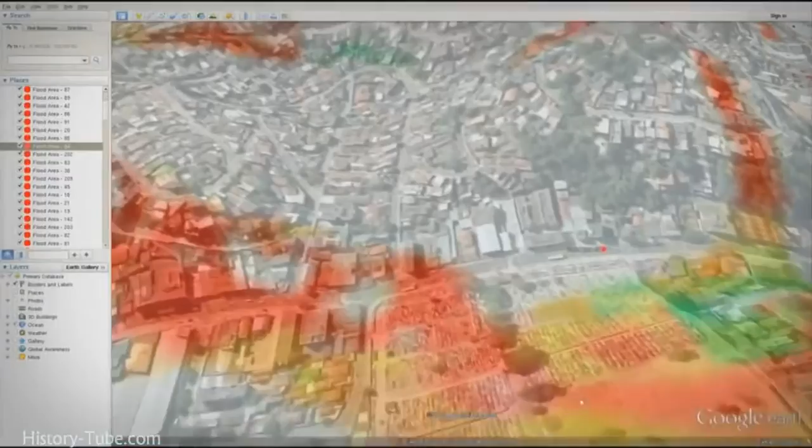In the real world, the answer to the question of can we see into the future has been answered with a resounding no. In our ever-evolving society, the trend today is to look toward the future by relying on predictive modeling to best predict the probability of an outcome. But we all know that even these well-thought-out predictions based on data often turn out to be not so predictable.

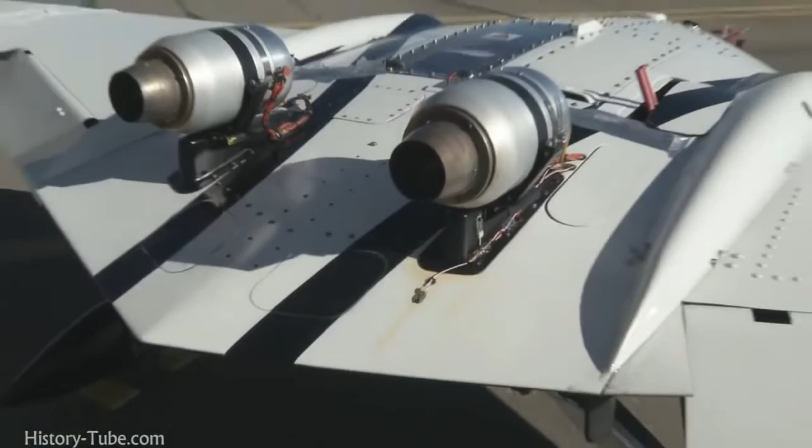Although it's clear that future events remain virtually unknowable, there is one group within NASA that comes as close as you can to seeing into the future. Throughout NASA's field centers, members of the Fixed Wing Project team are peering into the future every day and coming up with concepts that they believe will be on the next generation of aircraft. Because it takes years to plan and develop these concepts, the hardware and theories that are being tested today will be key components that enable the next generation of aircraft to take flight.

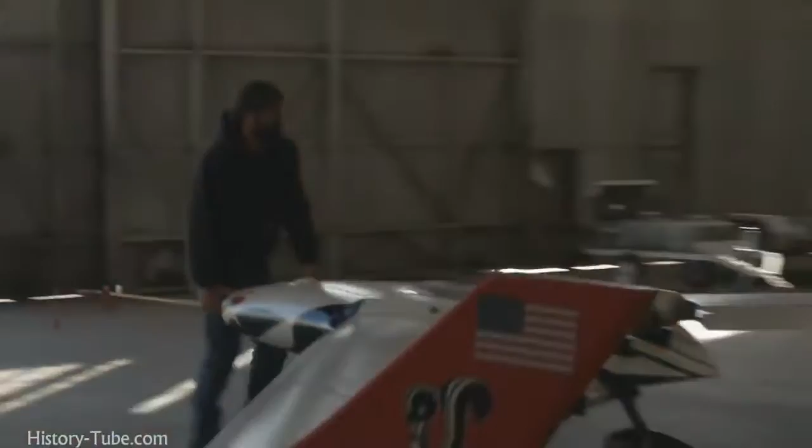On this episode of NASA X, follow us around the country as we visit members of the Fundamental Aeronautics Program's Fixed Wing Project, who are developing the framework that will shape how aircraft of the future will fly. Take a look behind the gates of NASA to see what some of these new ideas look like and how the engineers of NASA are paving the way for the ideas that will change the future of flight.

To the untrained eye, most of the aircraft of today look very similar. This is because over the past century of flight, aeronautical engineers have worked hard to optimize passenger aircraft to the point where they are as efficient and safe as possible. As a result, the basic tube and wing shape has been configured and examined from every possible angle, making it the most efficient design possible today.

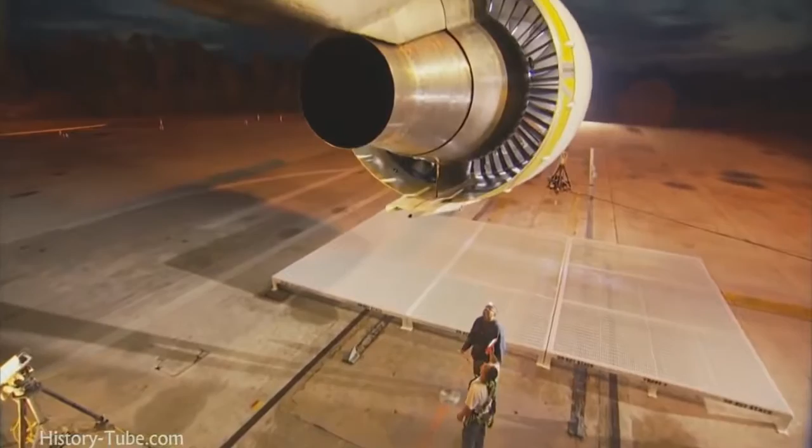Although aircraft have looked basically the same over the past few decades, if you look closely, you can see some of the major design changes. Wings that were once swept back more dramatically now are less so because of advances in aerodynamic shaping. Engines that spewed emissions by the ton are now much more efficient. Materials that were once so heavy that they significantly weighed down a craft are now much lighter and stronger.

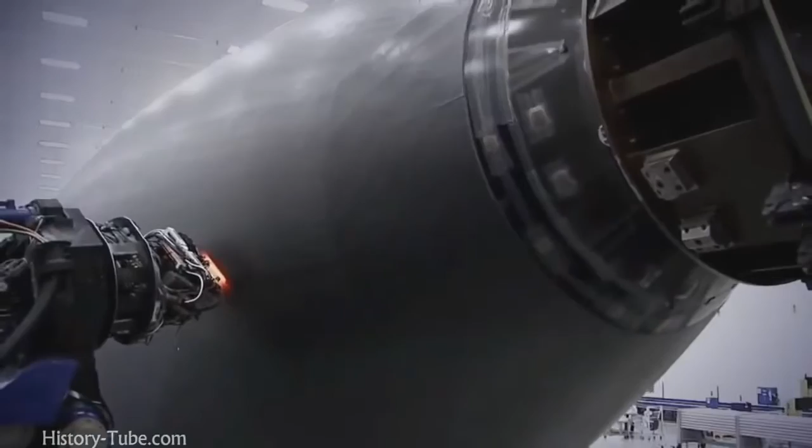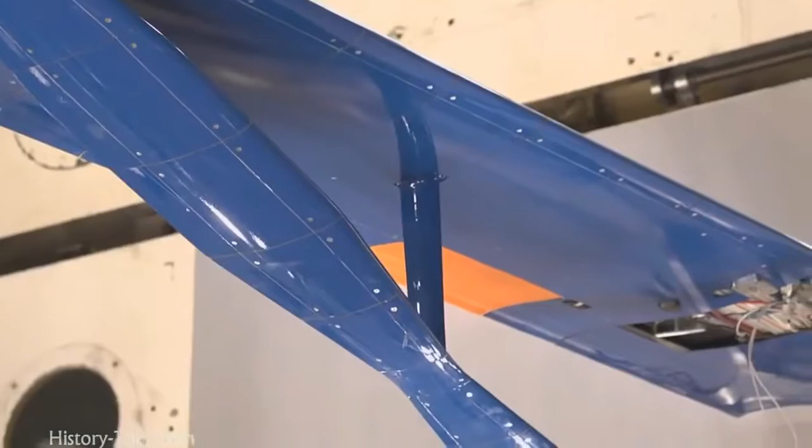With all this improvement and efficiency, it is fair to ask if there is anything else that can be done to make flight even better. The answer is of course yes. Behind the gates of NASA, there are scores of researchers who know that we can still make aircraft better because they are working toward these long-term goals every day. Some of these researchers from the Fixed Wing Project are working on so-called N+3 configurations and goals.

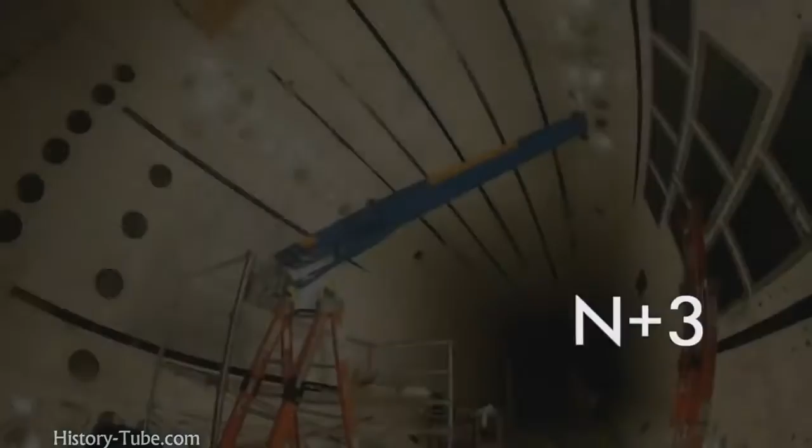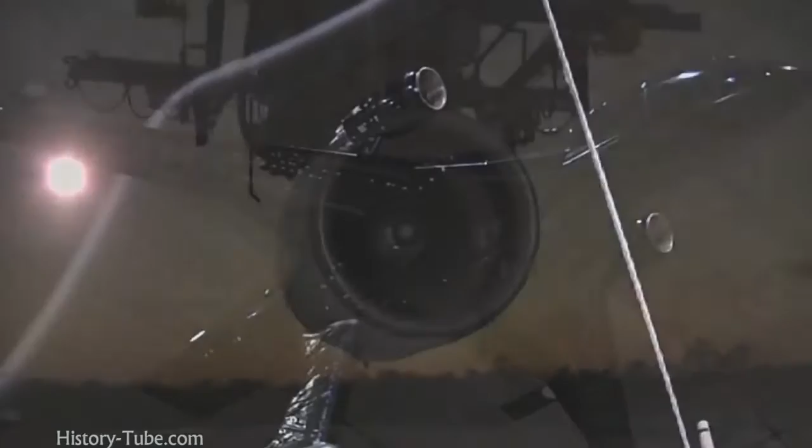In mathematical terms, the letter N is where you start now. N+1 is the next step. N+2 is just beyond that, and so on. Here in the Fixed Wing Project, N+3 equates to aircraft that will be flying in around the 2030-2035 timeframe. For this team, everything is on the table, including engines, fuels, wings, and fuselage shapes.

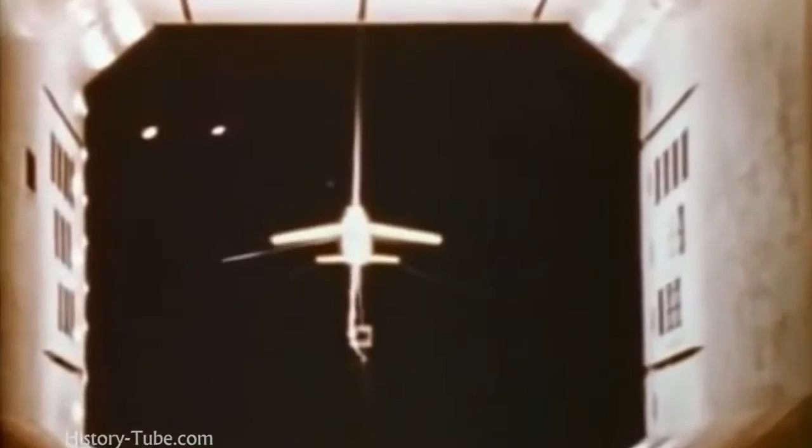Well, we need to remember the first A in NASA is aeronautics. So it's a National Aeronautics and Space Administration. Aeronautics is the field of research for airplanes. The airplanes that fly today were researched and experimented with within NASA many years ago. So we're trying to continue that tradition, that important work that we have done for the nation and the world, for 20, 30 years from now.

Fixed Wing is a NASA research program where we are doing activities to try to improve the airplanes that we're going to be flying in the future. We're trying to make them less noisy. We're trying to make them better for the environment. We're trying to make them in a fashion that they will use less fuel.

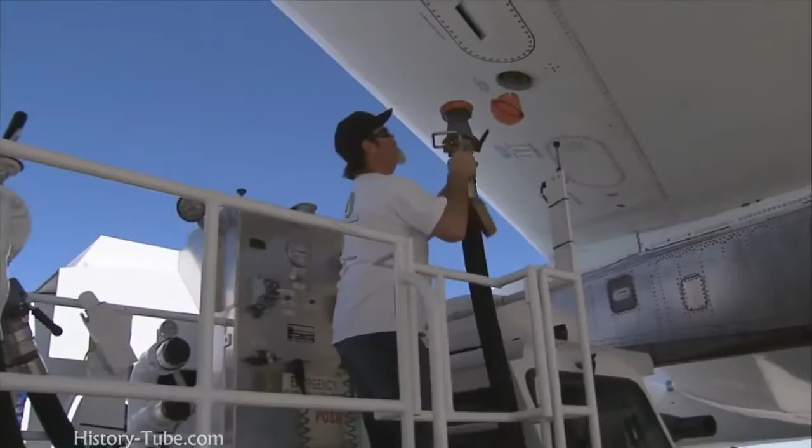The research we're doing is important because air travel is such an important part of your life. People travel, and even if you don't travel, cargo gets carried every single day. You use something every single day that gets carried by an aircraft. It's part of our way of life these days, and it often gets taken for granted. There are challenges though, so we are focused on exploring and developing technologies and concepts to improve the energy efficiency and environmental compatibility of transport aircraft.

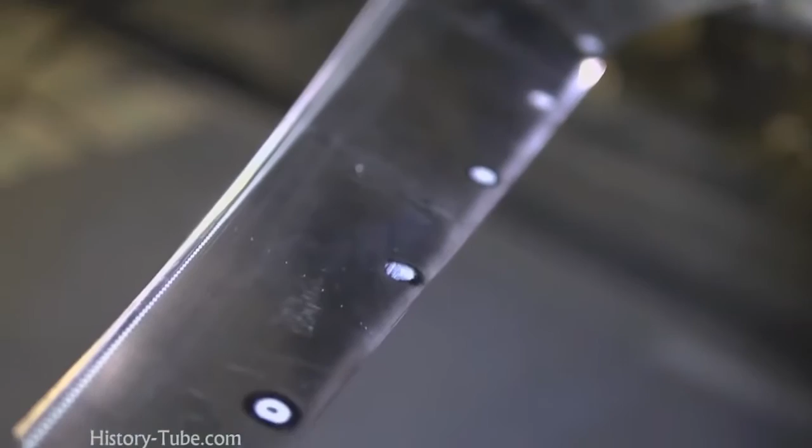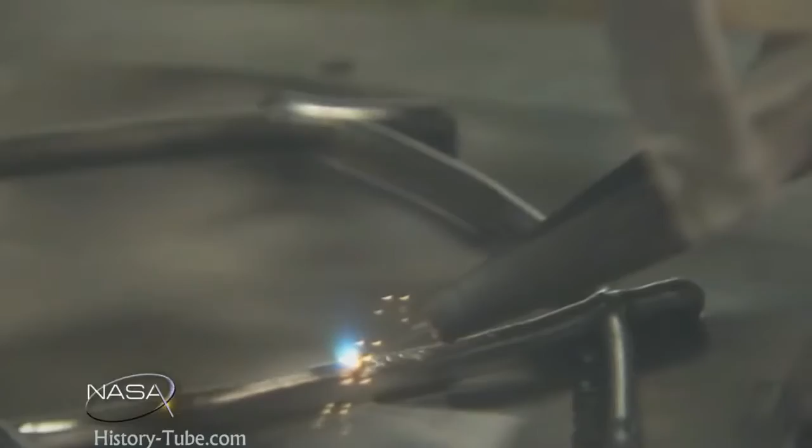With this mandate to significantly lower noise and emissions and increase performance for subsonic aircraft, there will be a need to address virtually every aspect of the current aircraft configuration, including developing new materials and engines, testing alternative fuels, and even changing the fundamental shape of the aircraft.

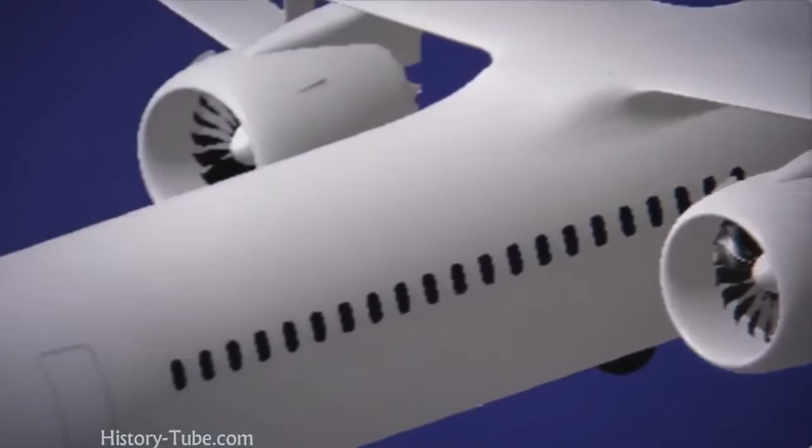All across the country, fixed-wing researchers are doing just that. Major advancements are being made into the understanding of how future aircraft will fly. Because there are so many areas of study, let's first look at something that has the potential to be used today as well as in the 2030 timeframe: alternative fuels.

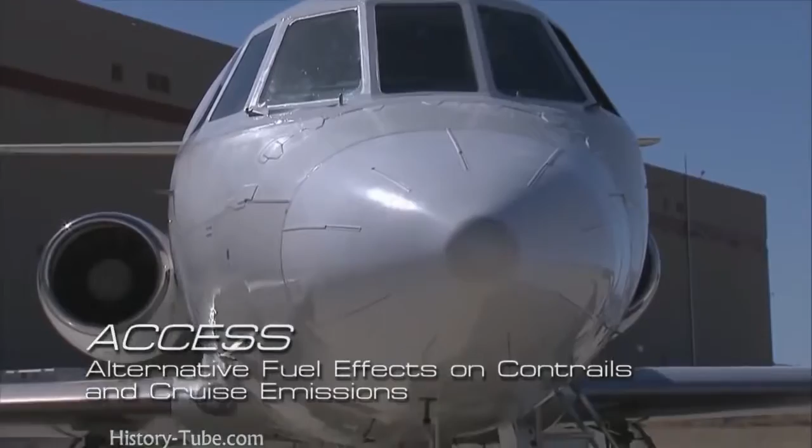On this beautiful morning at NASA Dryden in California's high desert, a test called ACCESS, or the Alternative Fuel Effects on Contrails and Cruise Emissions test, was performed to study the effects of alternate biofuel on engine performance, emissions, and aircraft-generated contrails at altitude. For this test, 2 aircraft were flown in tandem.

The first is NASA's DC-8, which will be burning an alternative fuel. The second aircraft is NASA's Falcon that will fly directly behind the DC-8 to measure and characterize the emissions coming out of the engines from the alternative fuel. Here is NASA's Bruce Anderson to explain.

NASA's role is in assessing the combustion characteristics of alternative fuels, as well as determining how these fuels will affect the performance and emissions from aircraft. To understand how aircraft affect the climate, we need to make measurements at cruise altitudes.

So the focus of ACCESS, or the alternative fuel effects on contrails and cruise emissions, was to fly behind the DC-8 in flight and look at its emission and contrail characteristics as we changed from standard jet fuel to a fuel that was a blend of a fuel that was made from camelina plant oil, and also added 50% of Jet A to that.

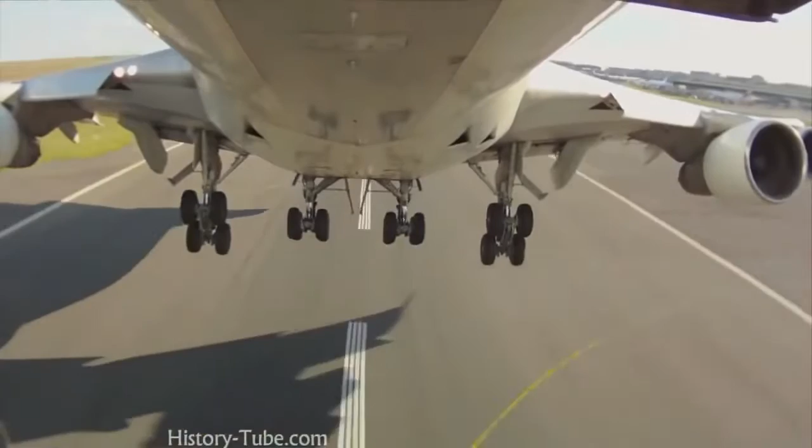The fundamental thing is the aircraft has to retain its performance characteristics when you burn a fuel. You can't have any drop in power. The fuel also has to have similar characteristics in terms of density and volume to kerosene. So what we're looking at is drop-in fuels.

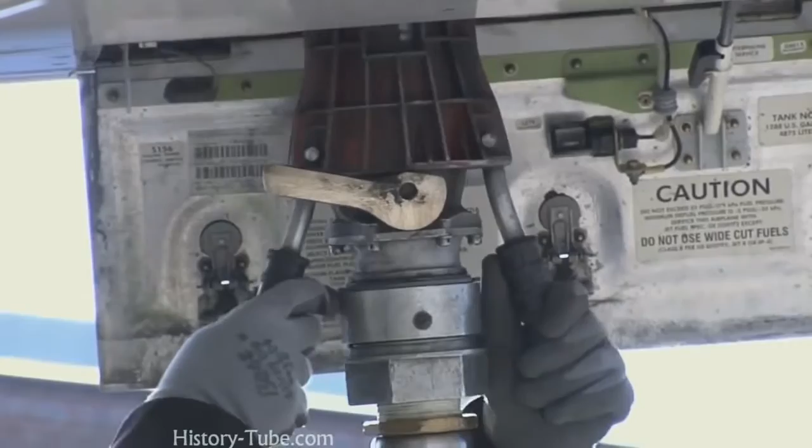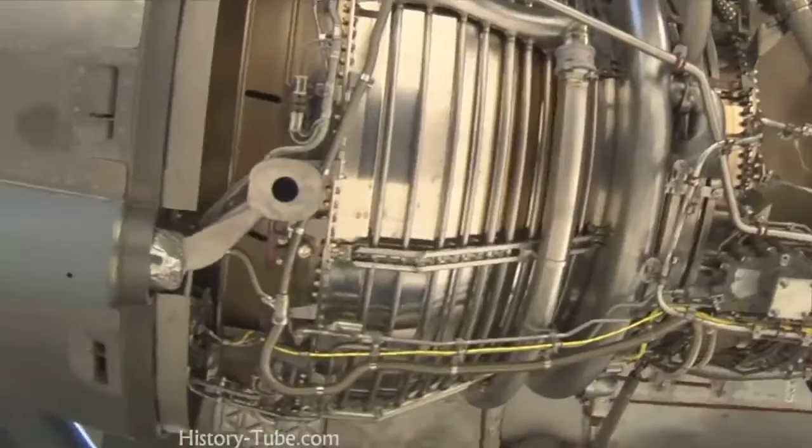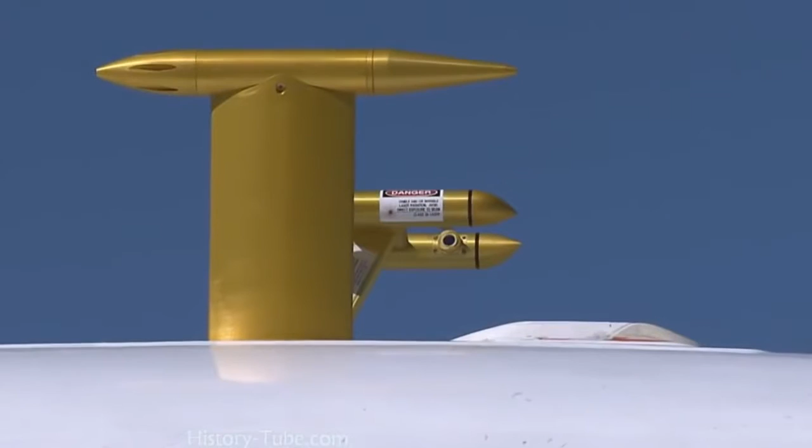A lot of the fuel systems on the aircraft are designed to rely on the aromatics in the fossil fuels to swell the seals to make them leak tight. So when we fly an alternative fuel, we have to mix it with standard fuel to retain those properties. Otherwise, the fuel would just leak out of the aircraft. And then the second thing we're looking at is just the emission characteristics. By that I mean the amount of pollutant generated per kilogram of fuel burn.

After the first few flights, it was shown that using these types of alternative fuels could significantly reduce emissions at cruise altitudes, particularly soot emissions. Work continues to better understand how to use these fuels and how to make them even more efficient for future aircraft.

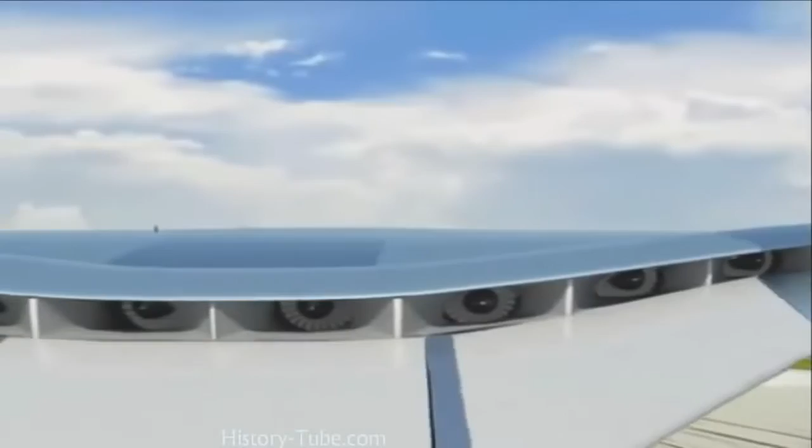Other than alternative fuels, there are some other ideas out there for finding more efficient ways to power aircraft. If we look on our roads today, many of the cars that are now being driven run on a combination of fuel and electricity. The idea that aircraft could do this seemed far-fetched only a few short years ago, but today, this idea is gaining traction. There are several ideas on how to do this, so let's take a look at a few.

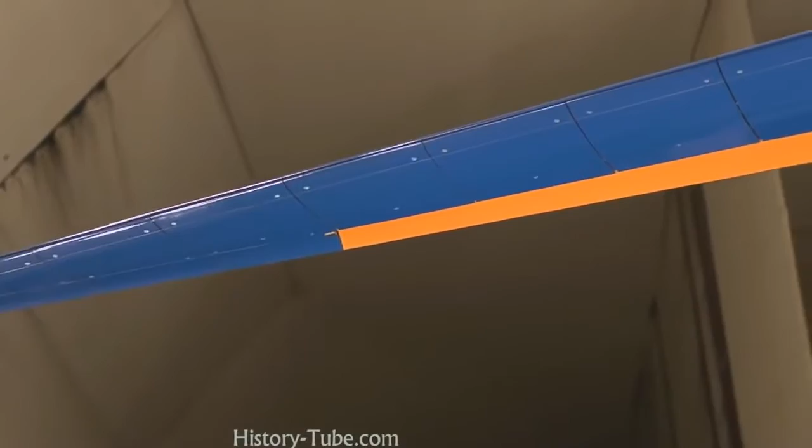Here, a team is looking over a new Boeing aircraft design called Sugar Volt. This unique design has several interesting changes, like the truss-braced wings that have the potential to reduce the drag of the wings by making them longer and thinner. Because thin, long wings have the tendency to flex more, designers have included a clever, efficient truss structure to support them. This design has the potential to reduce drag and weight, thereby making the craft more efficient to operate.

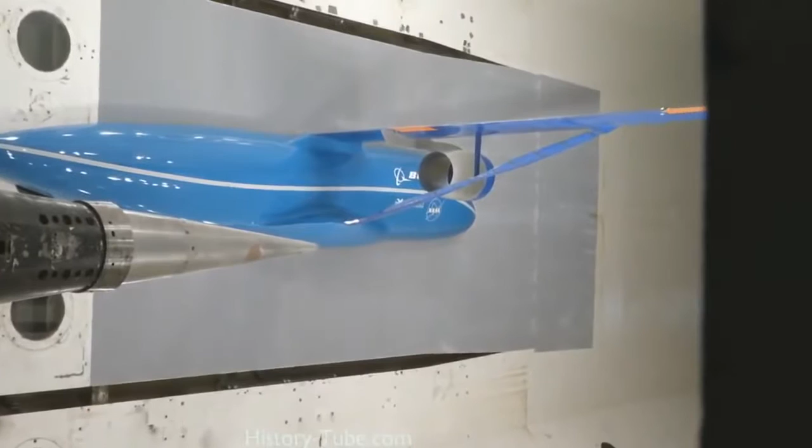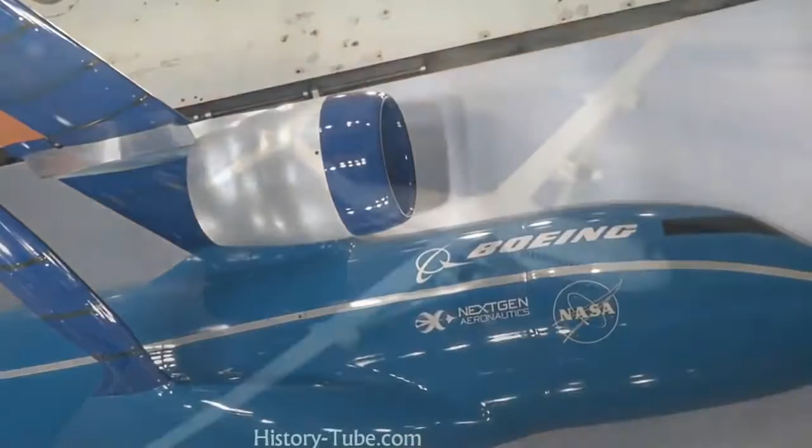At first glance, those unique structural changes may look like the biggest game changer for this type of aircraft, but the Sugar concept holds another surprise as well. In the case of the Sugar concept, what's less obvious to the eye when you see it is that it has an unconventional propulsion system. It's a hybrid gas-electric concept that's closer to what you see in a Prius. It has batteries and a gas turbine engine technology.

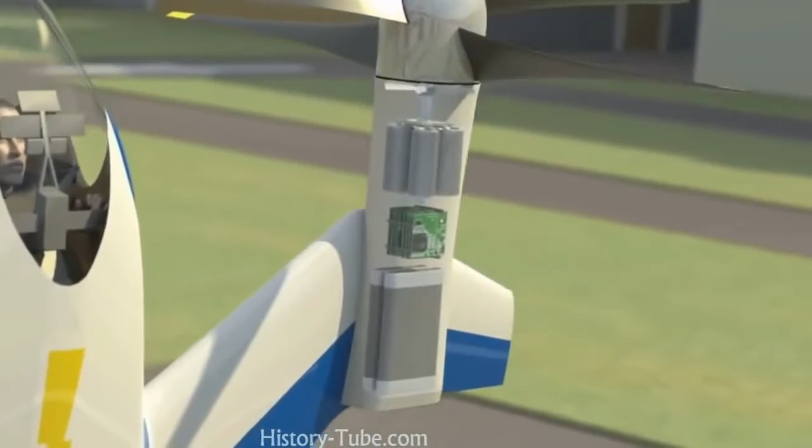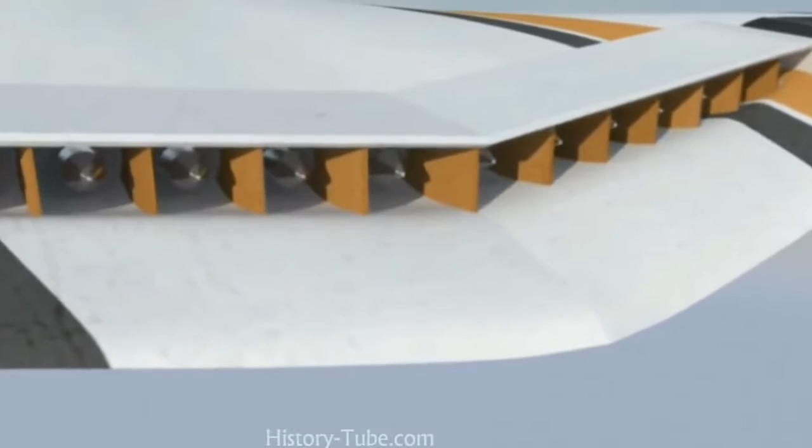It requires advances to battery technology, but those are happening throughout the world independent of the aerospace industry, and we're trying to leverage that. We do it on cars, we should be able to do it on airplanes eventually. The challenge is to take those batteries and have enough energy or power content and have them be lightweight.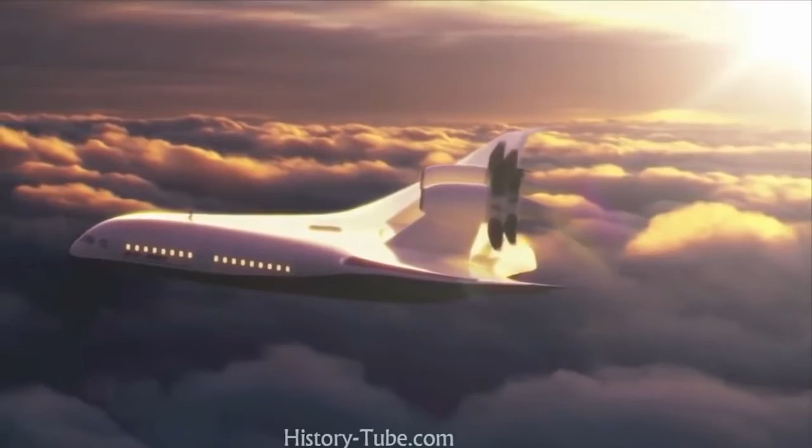Where we are today, I think, is we're at the dawn of the age where we can start to see electric propulsion or hybrid electric propulsion. And you'll see it on smaller aircraft first before you see it on the large commercial transports. But that's what we're working towards. That's good for cleanliness, it's good for noise, it's good for energy efficiency. Has its challenges. That's why we're working on it, and that's why it's not being done today.

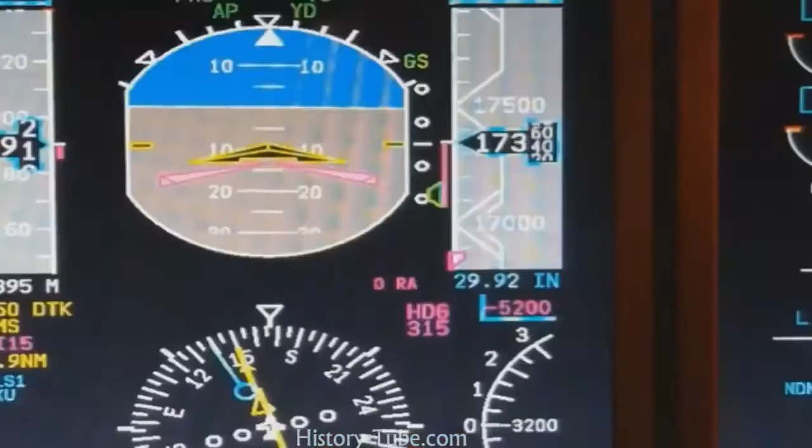The idea behind this vehicle is to have its twin engines burn fuel when great power is needed, like at takeoff. But when the craft is in a cruise configuration, a switch can be made over to a battery electric mode to supplement or even replace power to the engines. If successful, this could reduce the amount of fuel burn by up to 70%.

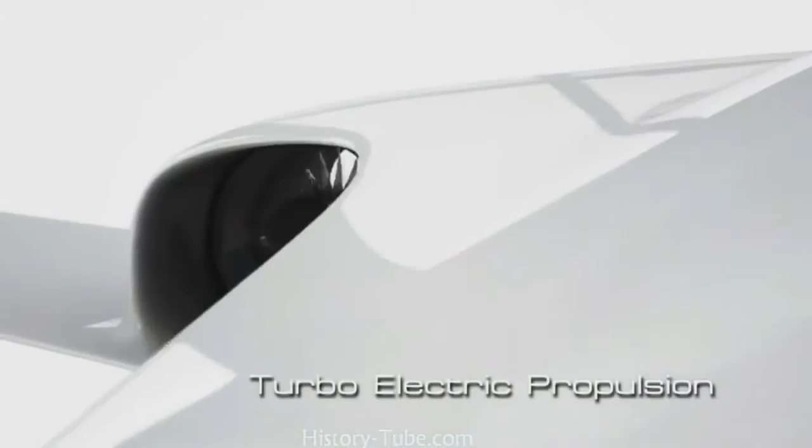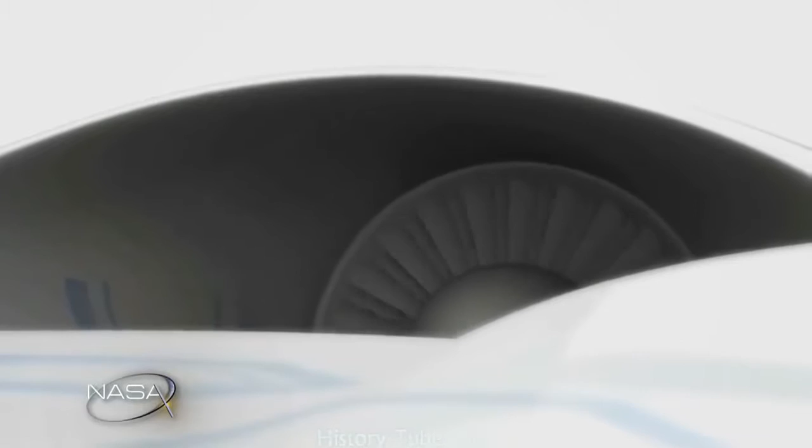Another concept called turboelectric propulsion is being studied here at the NASA Glenn Research Center. Here is NASA's Jerry Brown to explain. There's not been electric airplanes except in very small size. And the reason is that electric motors and generators tend to be too heavy for flight. We're hoping to change that, and we're hoping to get a benefit from saving a whole lot of fuel in the process. The type of electric propulsion that we're talking about today is turboelectric propulsion.

We're going to keep the turbine engine because it's really good as far as a lot of power in a small power plant. And then we're going to use its power to drive a generator, send electricity to motors that drive fans that do the propulsion. This concept will look very different from vehicles of today as well. Potential designs include 2 large turbine engines on the wingtips that will drive 2 large generators inside the body. The generators will in turn power a number of fans, providing the propulsion the aircraft needs to fly.

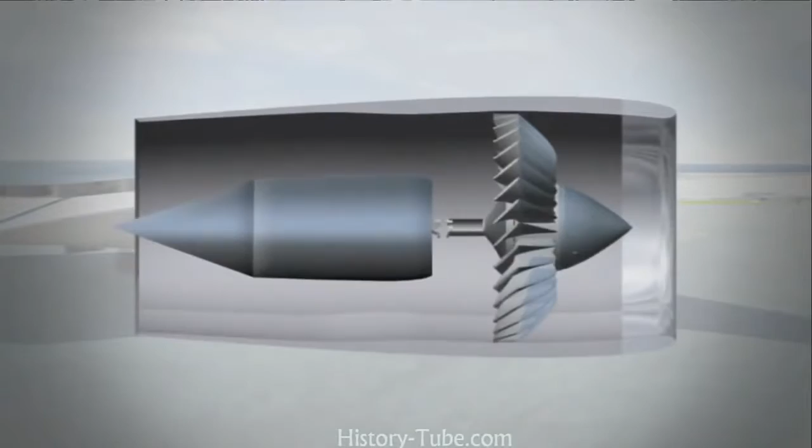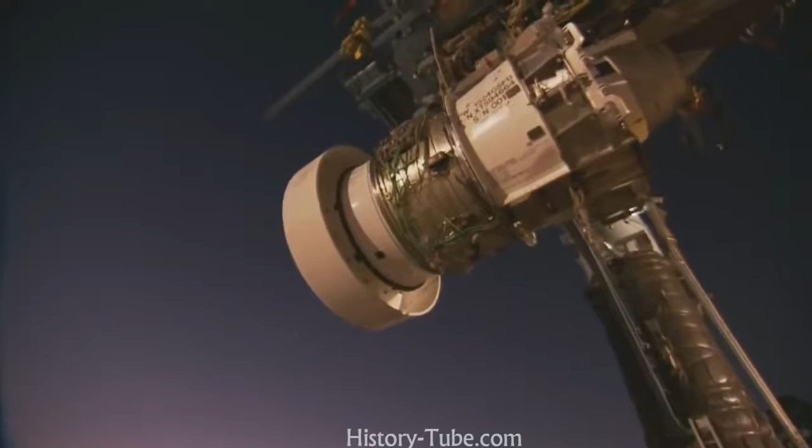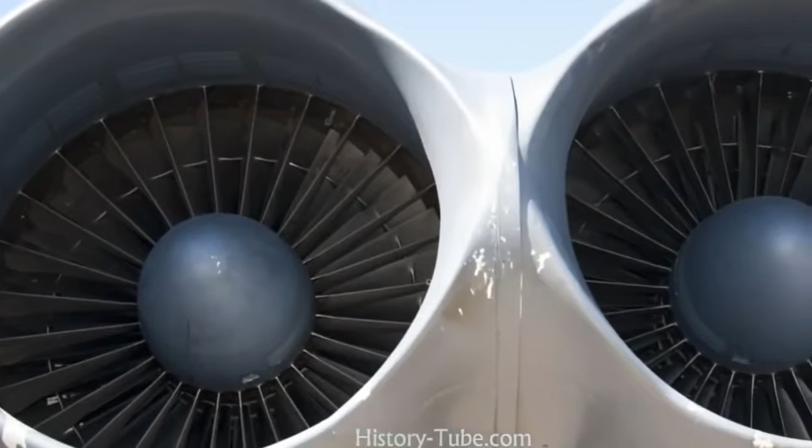What we want to do here is we want to be able to break the turbine engine from the fan, and that gives the aircraft designer a lot of freedom. If he can move the turbine engine somewhere else in the airplane, that may itself have advantages. The engine and the fans don't have to turn at the same speed. You don't even have to have the same number of fans. And that's what we're really looking for, is we want to have an array of a whole bunch of fans, maybe 15 of them, say, and just 2 engines. You like to keep just 2 big engines because the big engine is much more efficient.

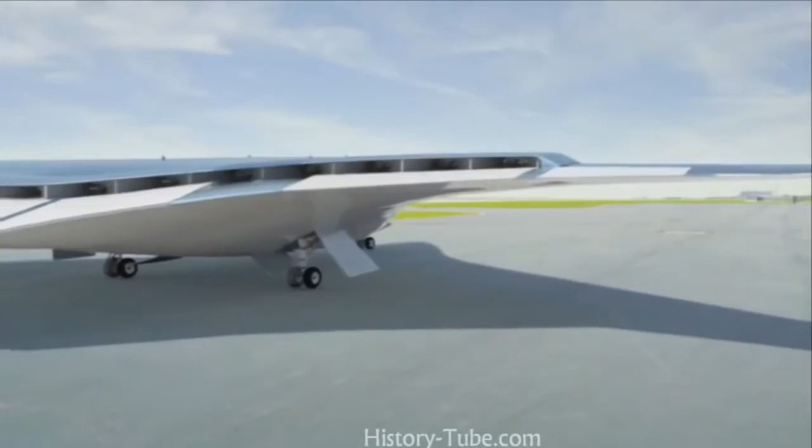This idea is intriguing, but big changes need to be made to make it viable. One major challenge is the need to reduce the size of the generators because the generators of today are way too big to fit on an aircraft. One idea that the NASA team is looking at is a way to remove the current type of copper windings in the generator and replace it with superconducting material. This change would allow the generators to shrink, making them viable to fit on future aircraft.

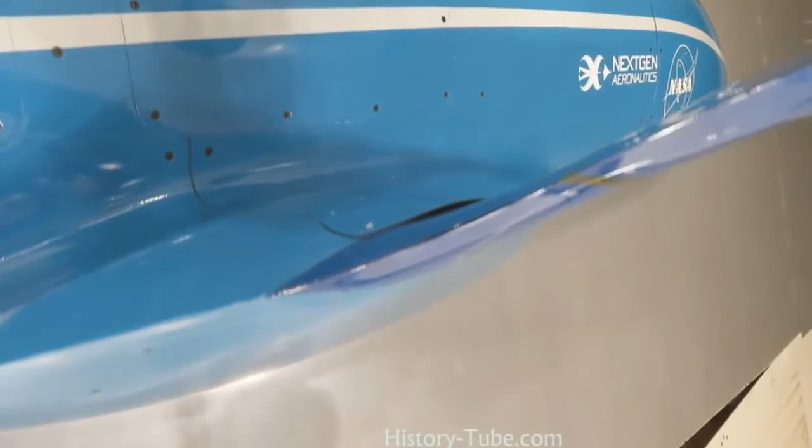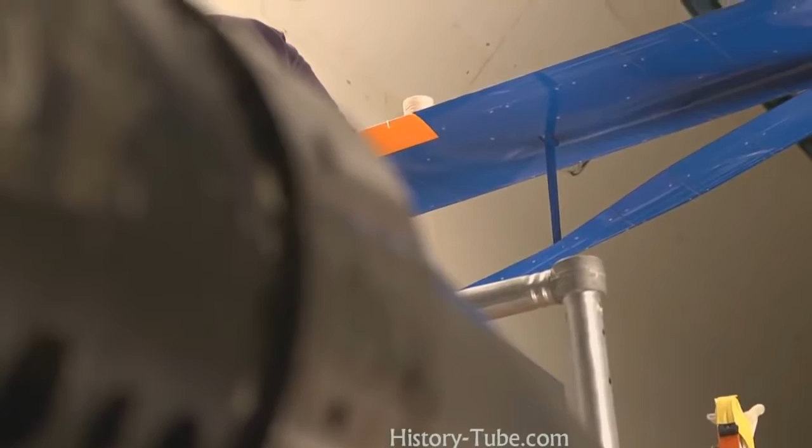As we've seen so far, new aircraft designs are coming online that have the potential to greatly improve aircraft efficiency. Another of these revolutionary designs has come out of a joint MIT and NASA study. This unique design is called the double bubble and has the potential to reduce fuel burn by up to 70% as well. So the MIT D8 double bubble design was something we've been working with MIT on for a number of years. The idea there is to take some of the lift that you would normally get from the wings and try and move that to the fuselage.

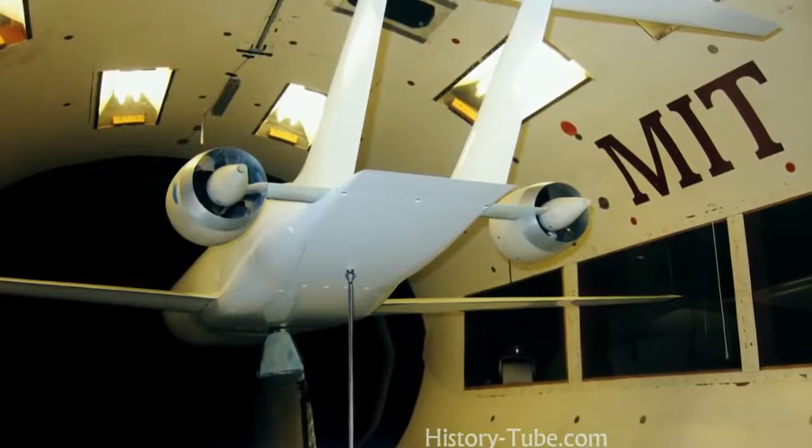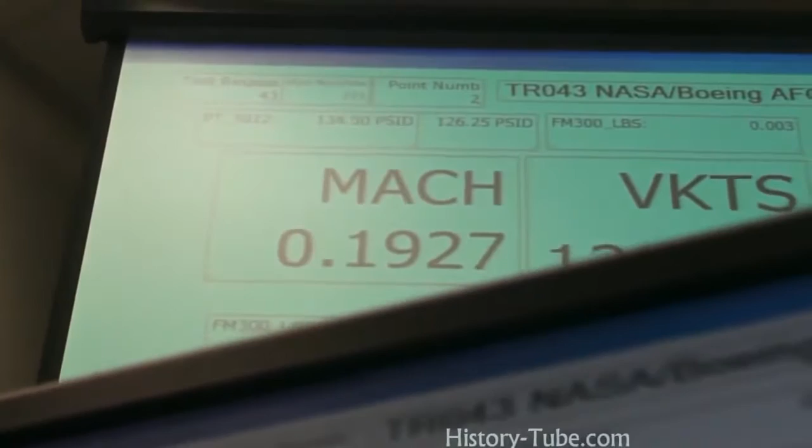Aiding much of the work is improved computational fluid dynamics and wind tunnel testing. Right here in this building, we have the Pleiades supercomputer, which is one of the largest supercomputers in the US and in the world.

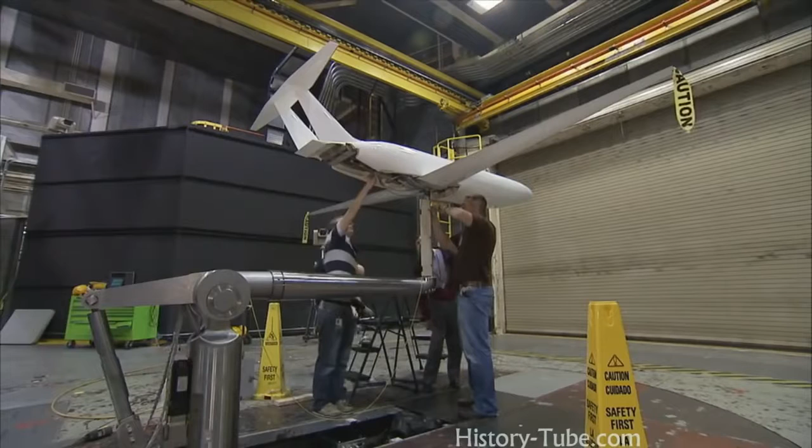It has 200,000 processors working on the problem if you use the whole machine on one problem. So it's a very large machine, and we need that very large machine because we need to do very big problems here at NASA. The aeronautics research directorate that we're using it for is to try and simulate the flow over these N+3 configurations.

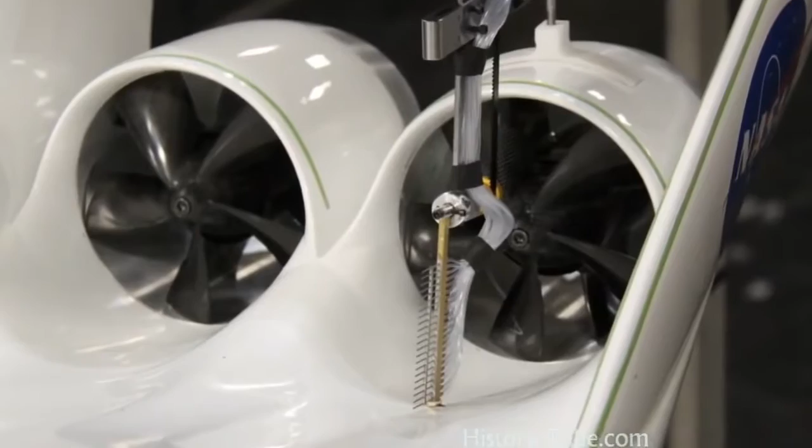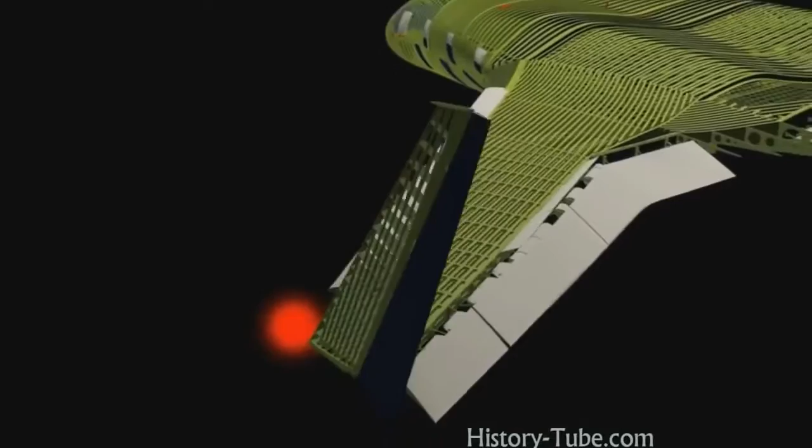So in order to capture all the detail you'd see on a vehicle like this, including what's going on inside the combustors of the engines and things like that, you need to have a lot of grid points to resolve all the fluid motion inside those engines over the airplane, and having that many grid points to resolve all that physics in 3 dimensions creates very large computational grids that require very big machines to advance the equations that govern the fluid motion and get these CFD, computational fluid dynamics solutions that we use to make our assessments.

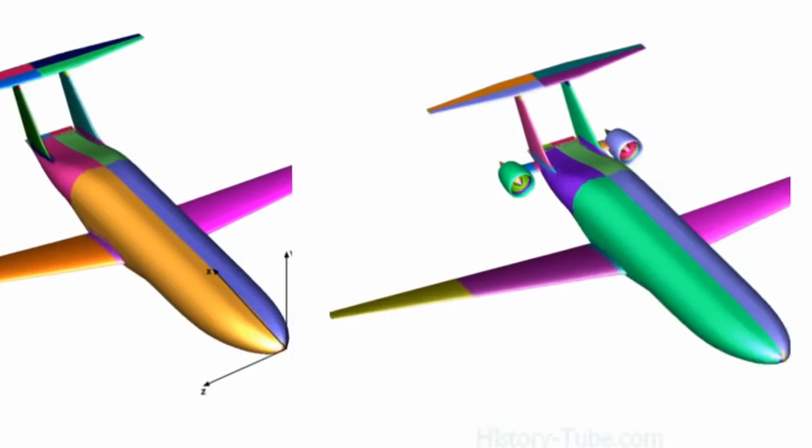Aerodynamicists of today are able to model ideas on computers, which allows them to test many different configurations before a wind tunnel model is ever built. Once a design is agreed upon, a wind tunnel model can then be fabricated and tested. This process was used for the double bubble as well, but the wind tunnel test showed surprising results.

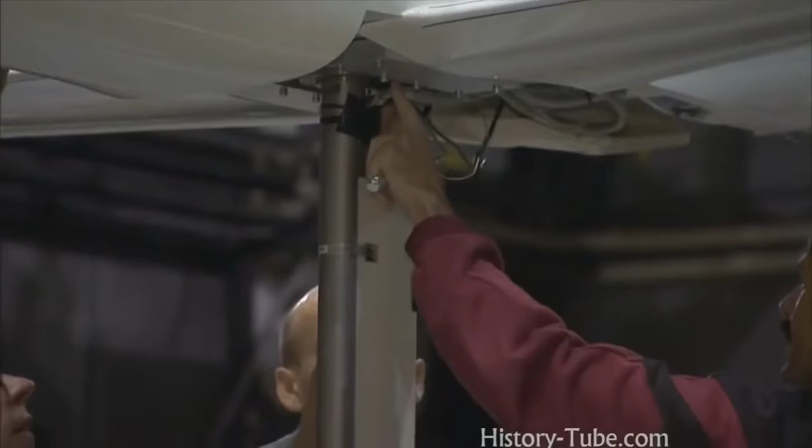The good news is that we've just completed the first test of this configuration in the Langley 14x22 wind tunnel at NASA Langley, and it showed even a greater reduction or a more fuel efficiency benefit to this technology than we had predicted on paper with our low-order models. So we're trying to digest the experimental data that show this nice benefit in fuel efficiency from this configuration.

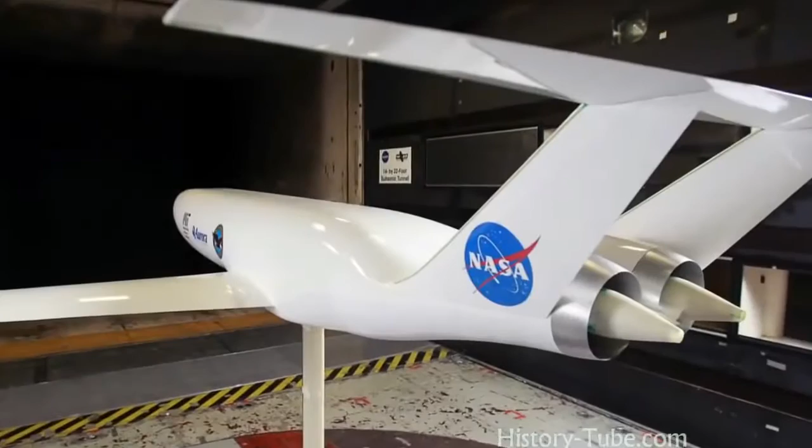At the same time, we're also using the supercomputer here at NASA Ames, the Pleiades supercomputer, to do computational fluid dynamics, CFD runs of these same configurations and see if we can confirm that benefit on the computational side as well. Testing will continue on the double bubble, and if the results hold, you may see this type of aircraft at an airport near you in the future.

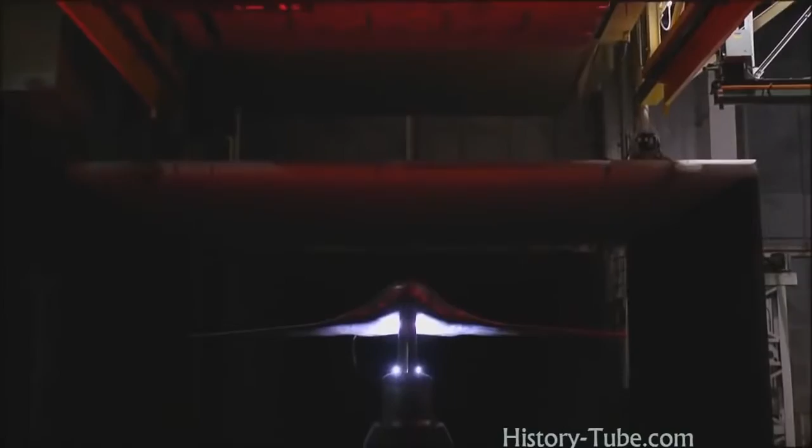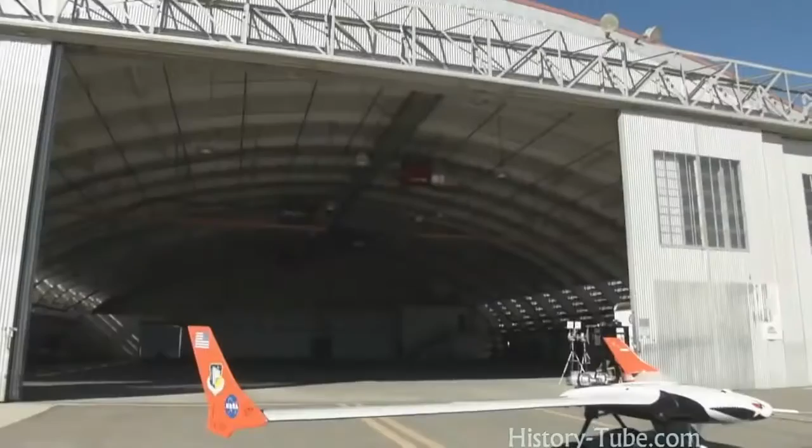When testing aircraft, many different stages occur. We have already mentioned CFD and wind tunnel testing, but another tool in testing future designs is to build a flying scale model. Although CFD and wind tunnel modeling is the mainstay, often test flights of these small, scaled-down versions of an aircraft offer some of the most dramatic results for researchers. That is the case with this aircraft, called the X-56.

This aircraft is being used as a test bed to understand how different wing configurations work and how a unique idea called active control may be used in the future. The whole concept behind the X-56 is that they've long known that a very long wingspan vehicle is more efficient than short wingspan vehicles.

Problem is though, when you get a very long wingspan, you start to get into issues with flutter modes that start to creep into the vehicle, so that the wing will go unstable and in extreme cases will rip off the vehicle. To get around that problem, you can use active flight controls to suppress those flutter modes.

Active control is you put things like accelerometers within the wing, and as soon as you sense that the wing is starting to get into these flutter modes, you use the control surfaces behind the wing to damp that out. So the airplane, as it's flying, is continually fighting these modes and keeping the wing straight and stiff. Then you can build a lighter, longer wingspan vehicle that is more efficient.

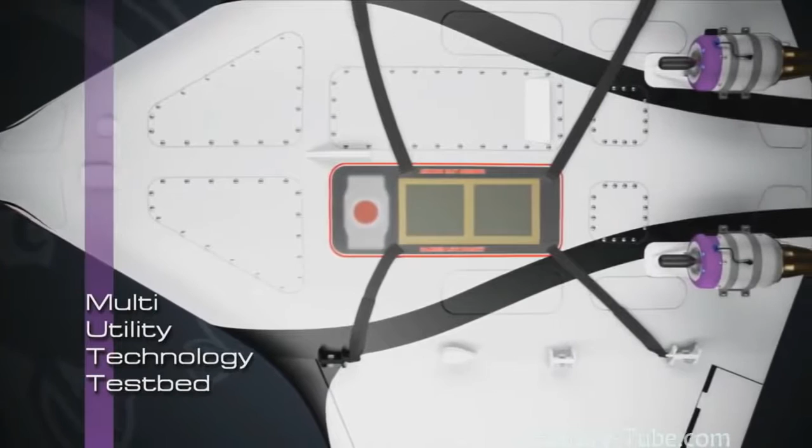This vehicle, as funded by the Air Force, was built as a multi-utility technology test bed. They call it the MUTT for short, and it is built to do a lot of different kinds of testing in aeronautics. The wings are removable. You can put on a stiff wing, you can put on a flex wing, you could do a joined wing configuration. We can learn quite a bit from testing this kind of vehicle. Right now, the focus is on flexible wing and active control of flexible wings, but in the future, there are many experiments that can be done with this vehicle.

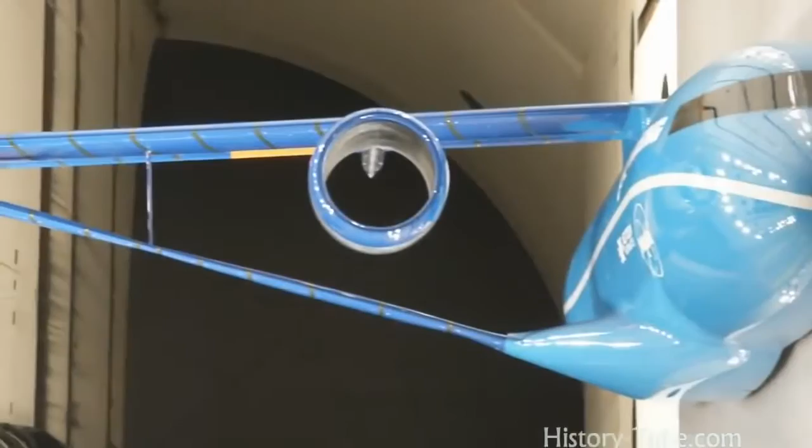The research on the control of lightweight, flexible wings being performed today on the X-56 is key to enabling the long, thin, low-drag, and low-weight wings of tomorrow's N+3 configurations. Much is going into understanding what it will take to improve the already incredibly efficient aircraft of today into ultra-efficient vehicles of the future. Although we don't have all the answers yet, it's clear that NASA and its brilliant engineers and researchers are helping to lead the way to a safer and more efficient way to travel.

We are nowhere near the maximum that we can get out of this industry. And there is a lot of work to do, and that's what my team is doing. That's what we're doing within NASA, and I cannot wait for the future.